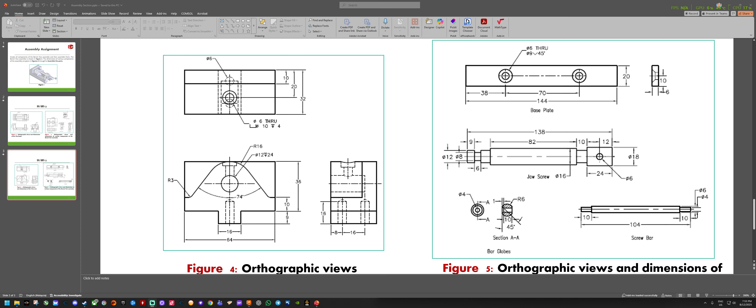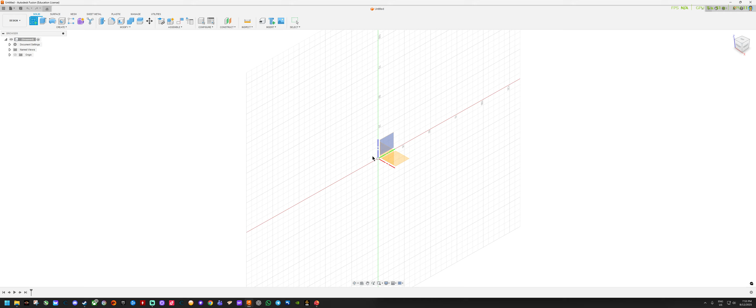I'm going to start with the front view first. Let's move to the software Fusion 360. Select create sketch and select the plane that you want to draw. As mentioned before, we are going to start with the front plane.

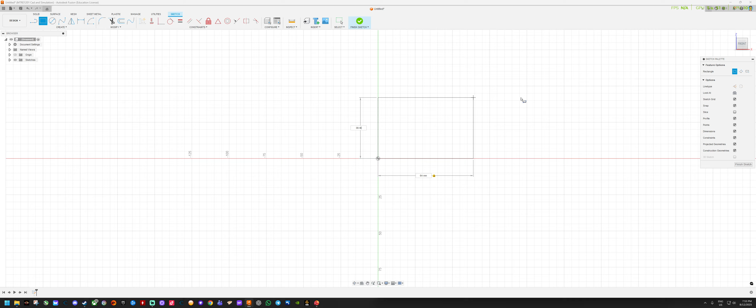Let's draw a circle, a rectangle, and the length is 64 and the height is 36 plus 9. So this is the area that we are going to work with.

So always start with finding the center line. Then transform this line to a construction line by selecting X on your keyboard.

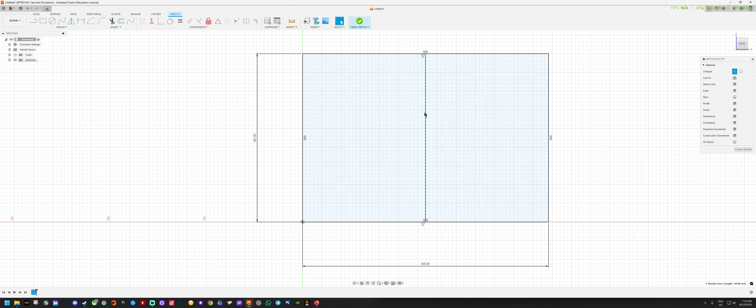From here, we are going to draw the bottom line. This one is 8, to the left also 8. And going up, which is 10, and to the left. Also this one going up 10, and to the right.

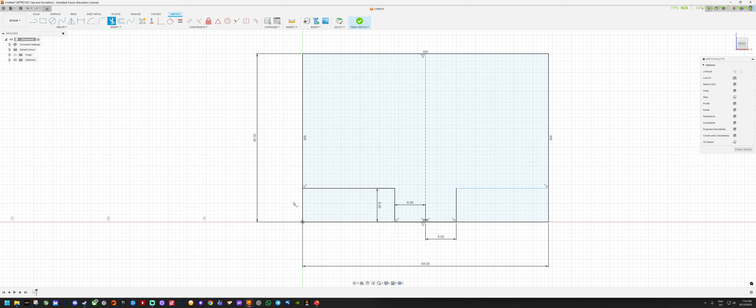So using the function trim, we are going to remove this part.

And now we need to draw, I think this is the most difficult part, the curve part on the center of this object.

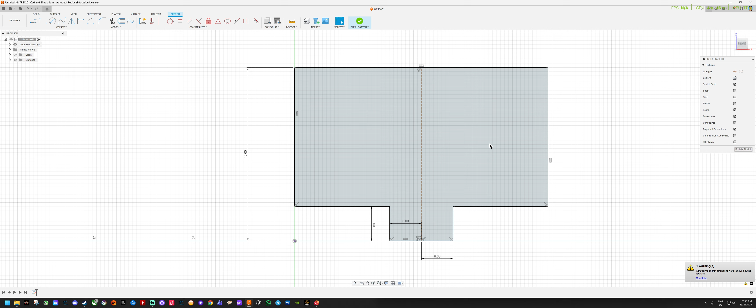So let's draw this line first. And the height should be 10. Sorry, let me remove this one. The height of this line from this line should be 10.

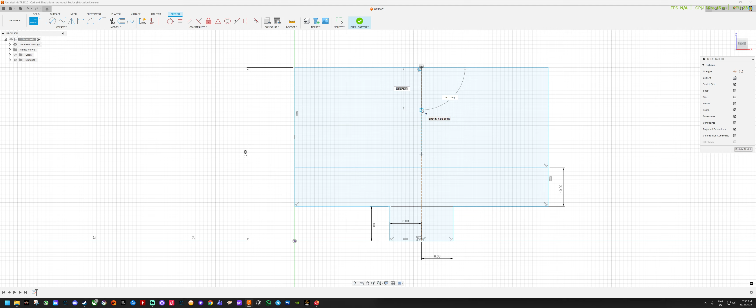So let's draw the circle at the center. The length is 16. Let's mark the line first. So going down 16, and there should be a circle here.

And then I remove this line earlier that I made. Not this one, okay, this one we want to remove. Now we have this line, this circle, the origin.

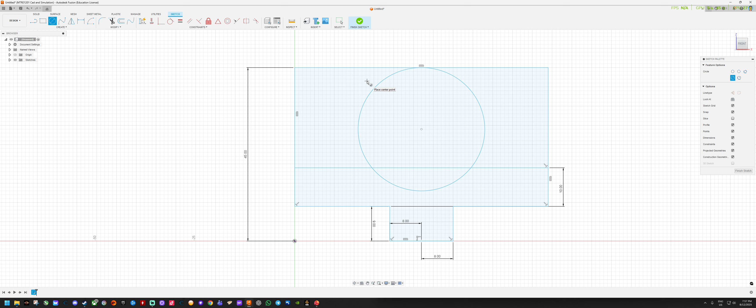We are going to create another circle, which the diameter is 12. Let me check the diameter of this one, 32. Okay, I think that should be okay.

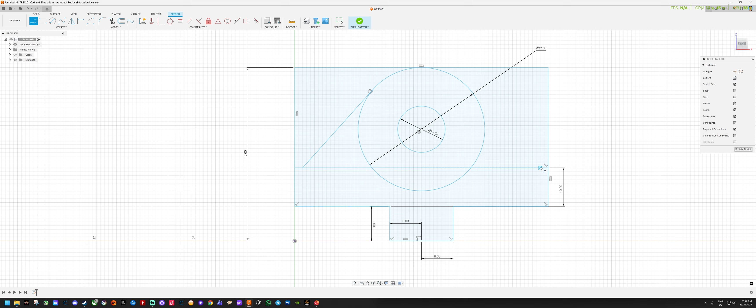Now we are going to draw the line, starting from here to this point. Like previously, make sure you get the tangent icon starting at this point, and also find the tangent icon. Then using the function trim, we remove this one, and also this one, and also the center here.

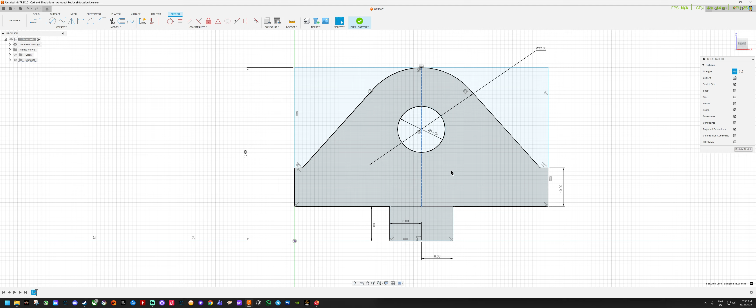So we are going to create again the line because we still need to use this construction line. And the angle between this line and this line is 74 divided by 2.

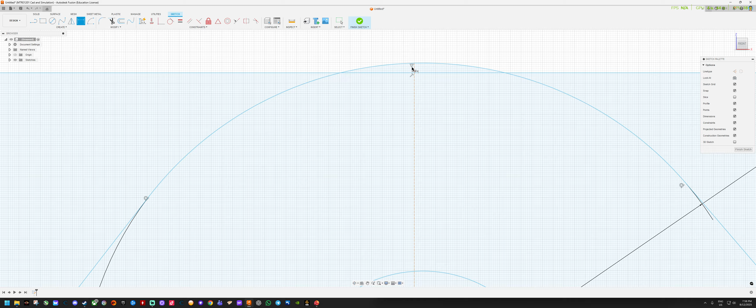Now you can see when we change it, the circle at the top also increases, going even above compared to the rectangle that we created earlier. So what's going to happen, I'm going to go back one step, two steps, and by selecting this line, I'm going to make this fixed.

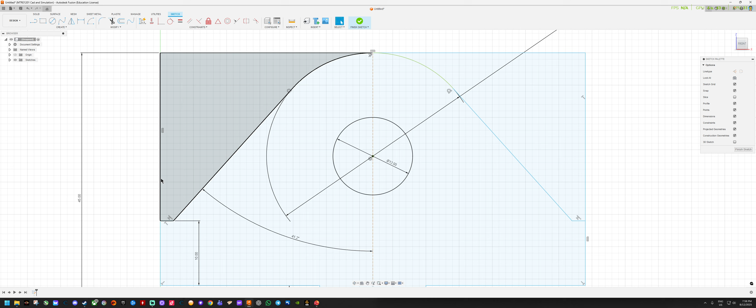So I hope this one is now fixed, it will not move anymore. So 74 divided by 2, so 37, and you can see the top here, it doesn't move anymore because by using the function fix and unfix, I can make it permanently stay at that location without changing any of the dimensions.

So sketch dimension, this line and this line, also 37.

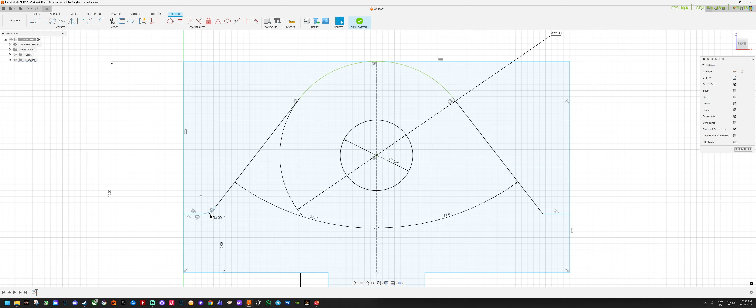And then don't forget to do the fillet, which is radius 3. Also here, fillet, radius is 3, and select enter.

So now I think we can remove this part. Although maybe we are going to need it later on, we are going to remove it first.

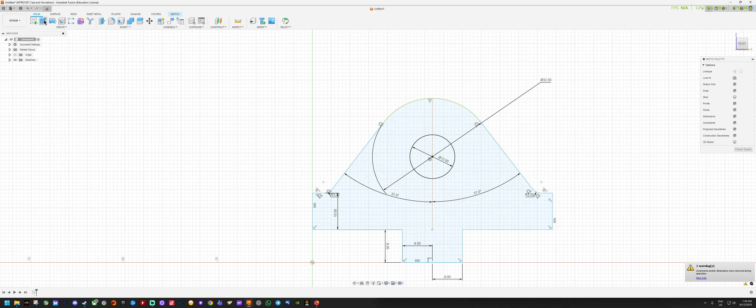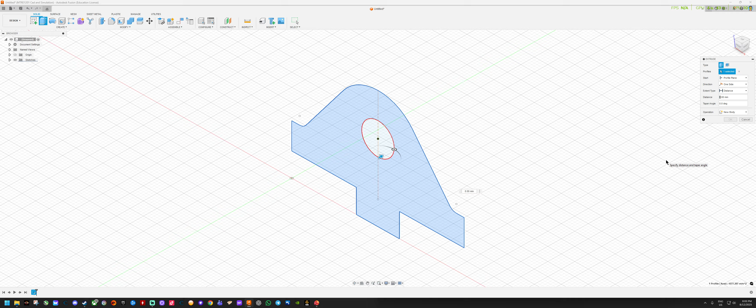Now we can extrude solid, select extrude, and select this profile. And the length that we want to extrude is, okay, we want to extrude to the back, and the value is 22. Select OK. Alright, this is the hard part.

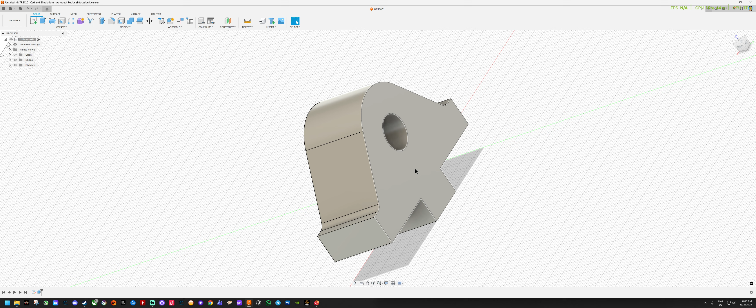Then moving back, going to the back. So go to the isometric view, and this is the front. So the other side is the back. So this is the front, so this is the back. So right click over here and create sketch.

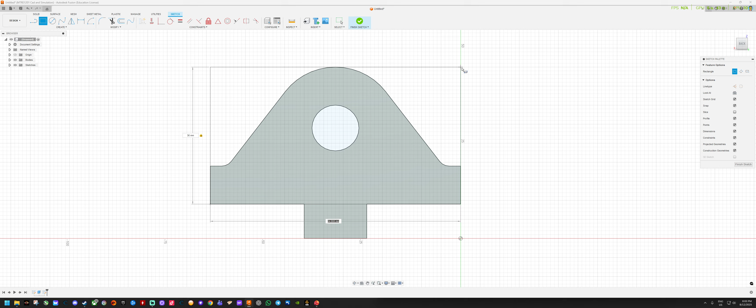Okay, create sketch. Now we want to draw a rectangle from this point. The height is 36, so make sure the height is 36, and the width is 64. Okay, now we got this.

Go back to isometric view, and then we want to extrude this profile going to the back. Make sure you click both. I don't know why suddenly they created this line over here. It is not supposed to appear.

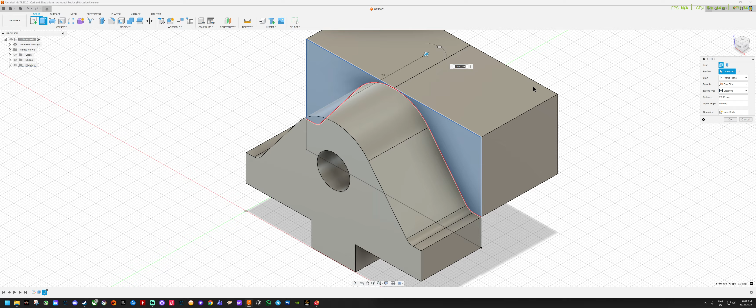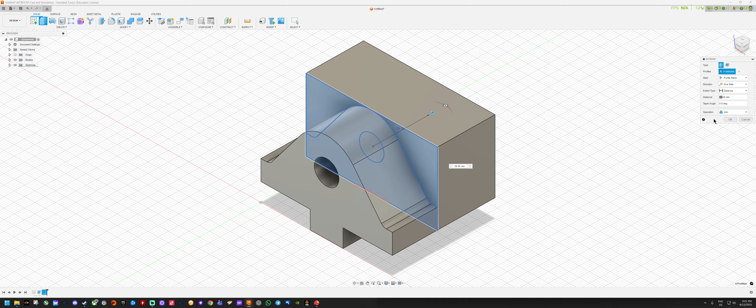Alright, so now I understand. Also click here, make sure you select the whole thing, even the circle. Alright, so now the line at the center has disappeared, and the length of the extrusion is only 10. Press enter.

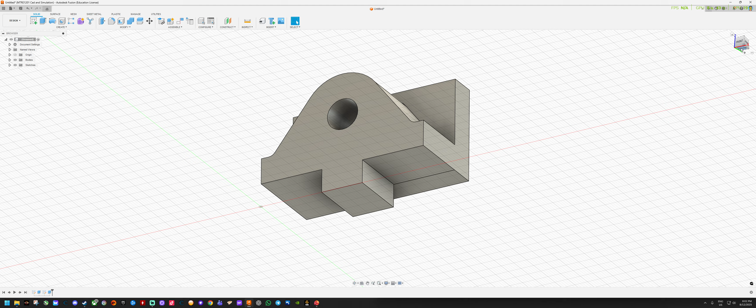Okay, now we just have a few more holes to create. So let's start at the bottom. Select the bottom. Oh, this one I think should be extruded to the end, it is not stop here.

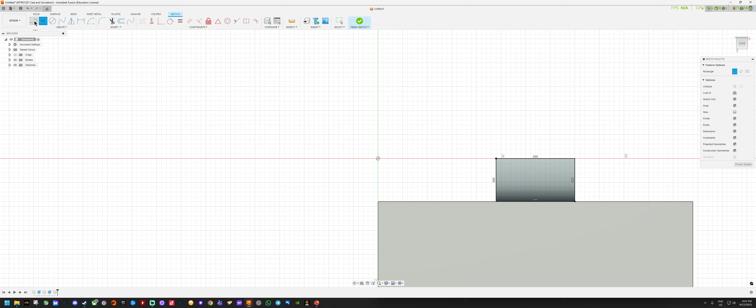So what I'm going to do, I'm just going to create a sketch over here using the rectangle function. Create a sketch and then extrude until it reaches this area, and then select OK.

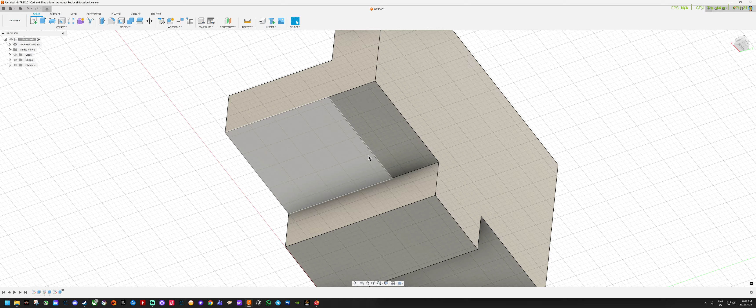Right, so another different thing appeared. I'm not sure why it's this line. So I think this one, just leave it for now and focus on the area over here. Select create sketch.

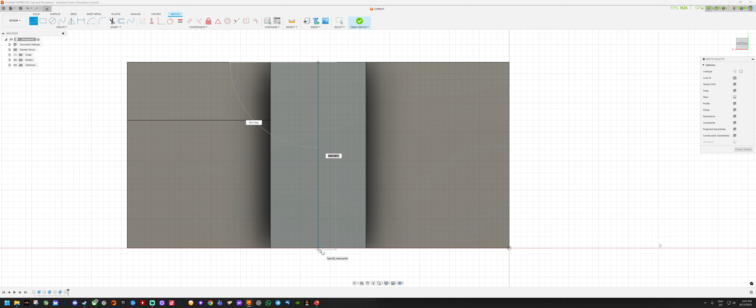Okay, so over here we have two holes that we need to draw. But before we decide where is the location, we start finding the center point, create a line, and then select the line, press X on your keyboard to change it to a construction line. And then using the center diameter circle function, create the circle.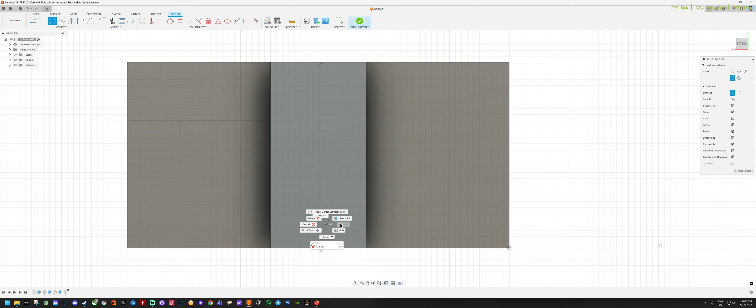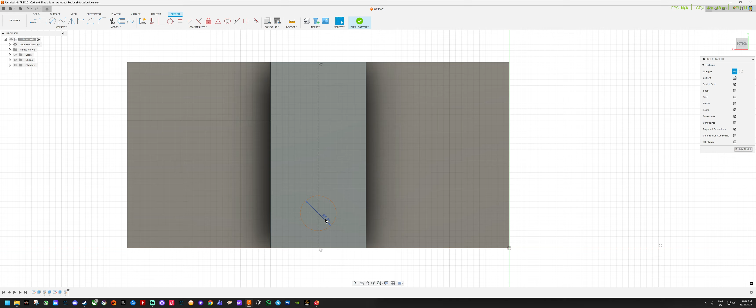Okay, let me check what is the diameter. It was not informed. So okay, let's use the previous dimension, which is a diameter of 6. Okay, and the length from this point to the reference length is 8.

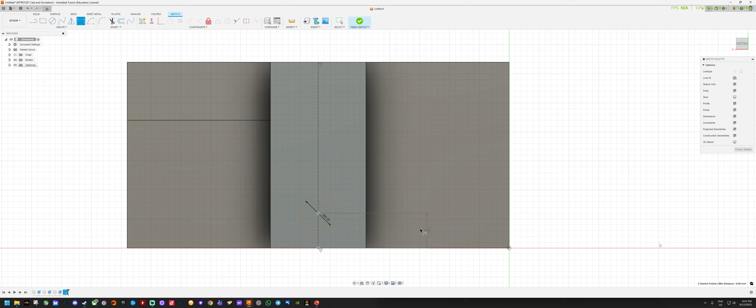Okay, try again. Sketch dimension. This point to this point is 8. And then another circle, also 6 in diameter, and the distance is 16.

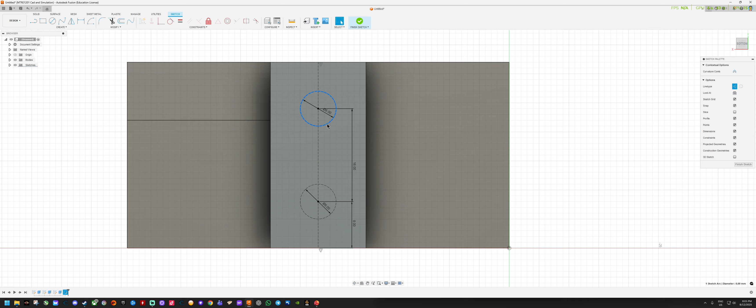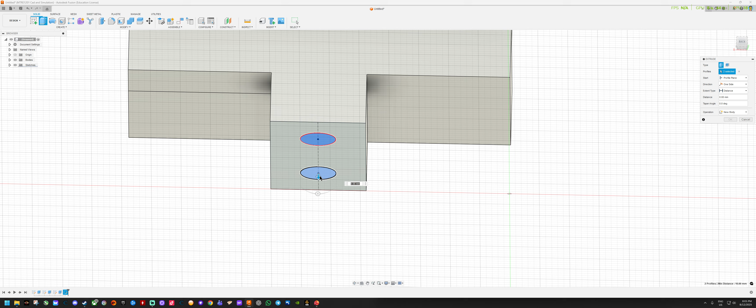Alright, but now we don't want this one to be a dotted line. Using the keyboard, press X when you select the circle, and select both of them. Select solid, select extrude, and then just move the object a little bit so it's easier to see. And the cut inside should be 16. Press enter.

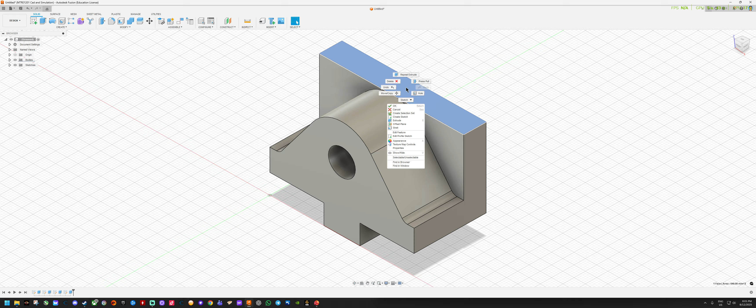Okay, so now we have done with the circle or the hole at the bottom for the screw. Now we need to draw a hole on the top of the object. So this one is a little bit complicated, and the simplest way to approach it is to right click on the surface on the top and select create sketch.

So over here, again, always start with drawing the center line. To find the center line, okay, select the line and press X. And now we know the circle should be somewhere in here.

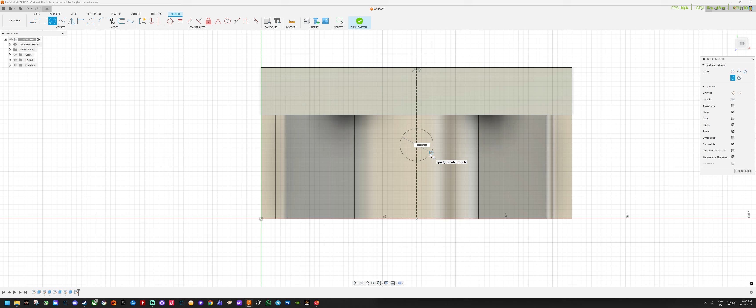The diameter, let me check the diameter. Okay, I think the diameter is 12. And the length is 20 from the top.

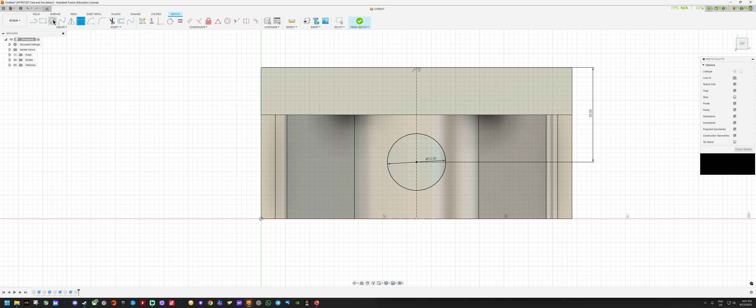And then if you look closely at the schematic, there will be another circle inside of the circle. Okay, and this one, the value is 6, I think. Okay, 6. So now we have 2 circles that we want to cut to the bottom.

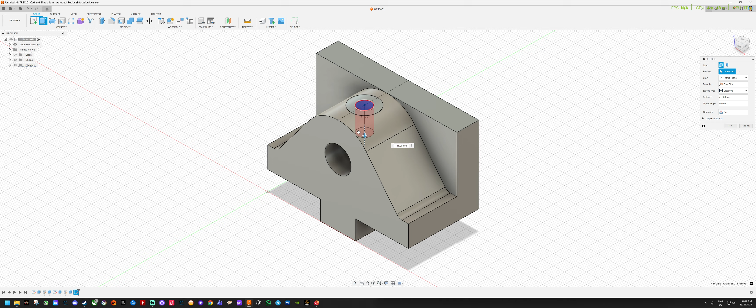So let's start with the smaller circle. Select this one and select all the way until it reaches the hole at the bottom, and select OK.

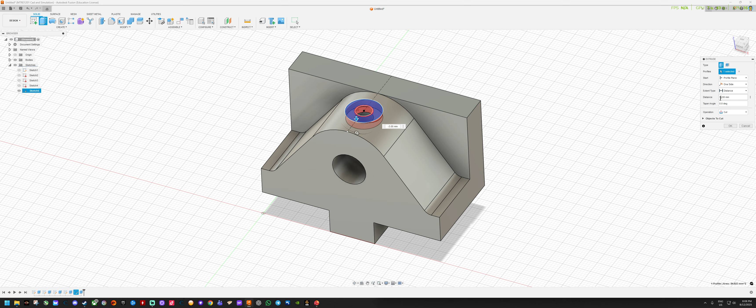So now we have finished the object of the vice jaw.